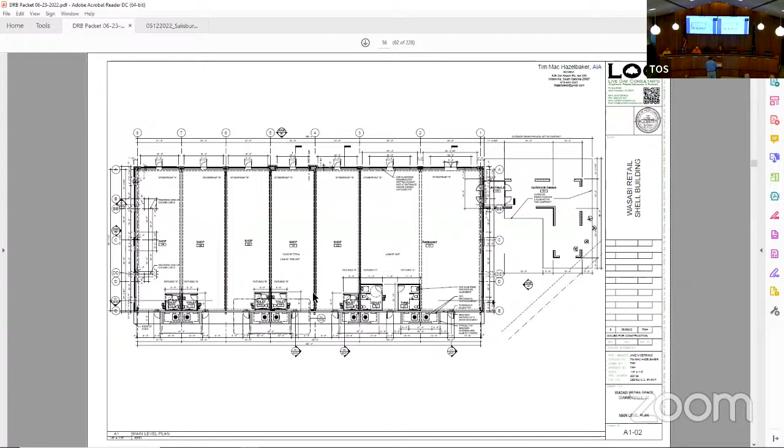You just sign in, state your name and your role in the project. As we do that, do we have any staff comments? Yeah, just one second. All right, so...

This is a request for preliminary approval of a proposed new single-family townhome development with an amenity center. The property is zoned PUD, planned unit development, located west of Old Dairy Road on the Salisbury parcel. Based on the review following our staff's comments, the site conceptually meets requirements. Plats will be approved before permitting. Street trees are provided on both sides of the streets and meet the required planting requirements. Street trees should be planted so as not to interfere with the proposed street lighting and should maintain a minimum distance of 15 feet. The board only has to review the amenity center and the townhome facades.

The exterior finishes include a mix of materials, including both horizontal and vertical siding materials, shingle roofs, and a brick base to the amenity center. Depth of the front porches is 6 feet on the one provided detail. A detailed elevation of the amenity center has not been provided, and details of the proposed poolside pergolas have not been provided. Detail of the mail kiosk has not been provided, and an entrance sign is proposed. The location meets requirements, but no design has been submitted.

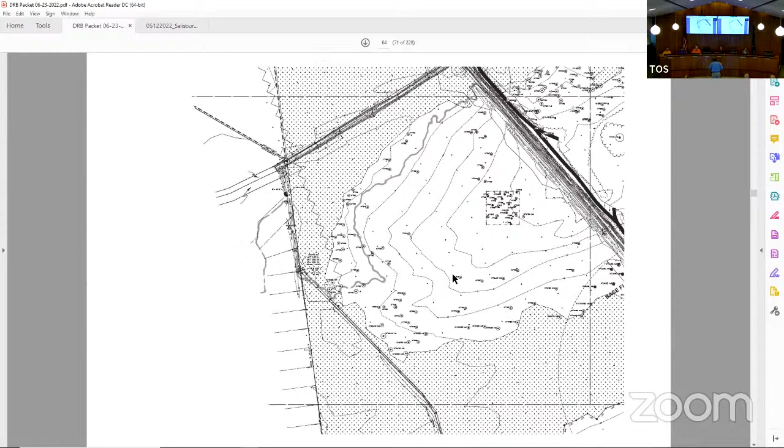So this is the tract where the development will occur. Plat, let's get to a site plan. So at this time, I can turn it over to the applicant.

Hi, my name is Keith Postal. I'm the Director of Land Acquisition for American Homes for Rent. American Homes for Rent is one of the largest build-for-rent companies in the country. We're in 22 states with approximately 60,000 properties we lease. We are typically a long-term owner of all our properties; in this particular community it would be upwards to 15 years that we would own this property, so this is not something we're going to sell off. We strive to be good neighbors, and we try to work very well and partner with our municipalities where we can, and we've had a lot of success doing that.

Our portion of the Salisbury Farm community is approximately 360 lots in its entirety, with 124 of those being townhome lots, which we'll be speaking about later. It will be a heavily amenitized community, which you'll see when the rest of the presentation is made. There'll be a clubhouse, a resort style pool, parks, and walking trails throughout the community. One thing we do as the owner is maintain all the common space, including the entry monuments, parks, and walking trails—they're all ours to maintain. We maintain all the homes as well as all the individual homes' yards; we do the lawn maintenance for everything.

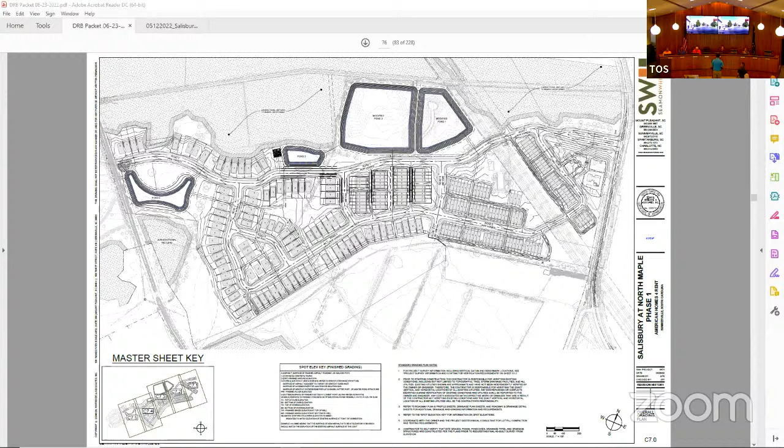So, but with that, I'll turn it over to Travis. He is the architect for American Homes for Rent, and he'll take it from here.

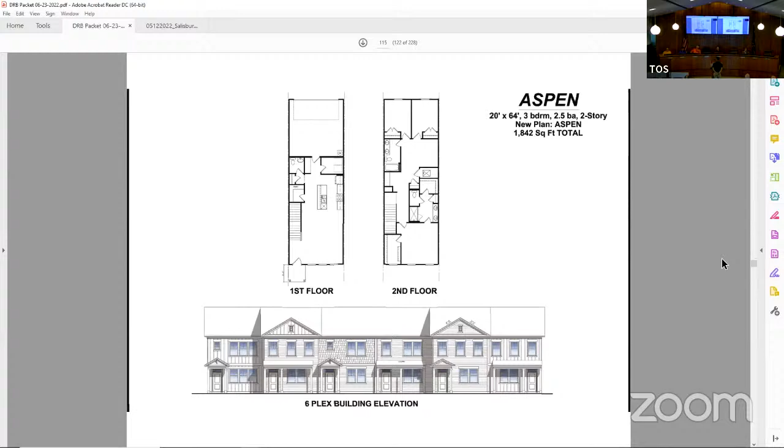Tell me when you want me to stop. Yeah, these are just going over the different elevations. We do break them up. There was a comment about not having all the same pitches, so we wanted to show the stagger of the townhomes.

And in this slide, we also showed the different color types. We are using Sherwin-Williams, so we wanted to make sure we use a high-end product. We are doing siding, HardiePlank.

Wanted to bring some so you can kind of see it also, some of the paint colors that we actually put some color on so you can see.

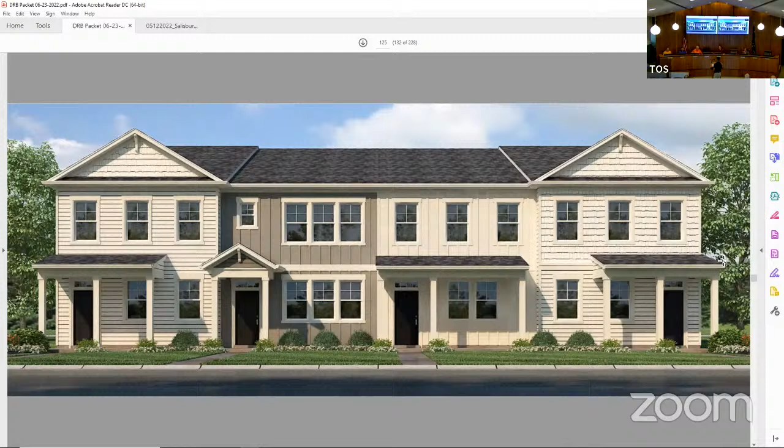And here's just another color rendering of it, more of a realistic color of what they're going to look like.

I think you said the porches are 6 foot deep. Yes, sir. Who's that? Minimum 6 foot deep, that's correct.

And that's all we have. Okay, you want to talk about the amenity center?

Doesn't look like it's changed too much. No, we didn't really change too much on that. What we wanted to do was show it on the fly through, what it looks like. So we kept the gables, kept the color, Sherwin-Williams alabaster. We're going to provide brick to give it a little color in the bottom, and then we're going to paint that same color, so it'll give it a little texture. And then there's the metal roof on the dormers, black windows.

All right, well since you're up here and we've got the amenity center up on the screen, we can start with that. You want to start? Not really. Okay Matt, thank you for the opportunity.

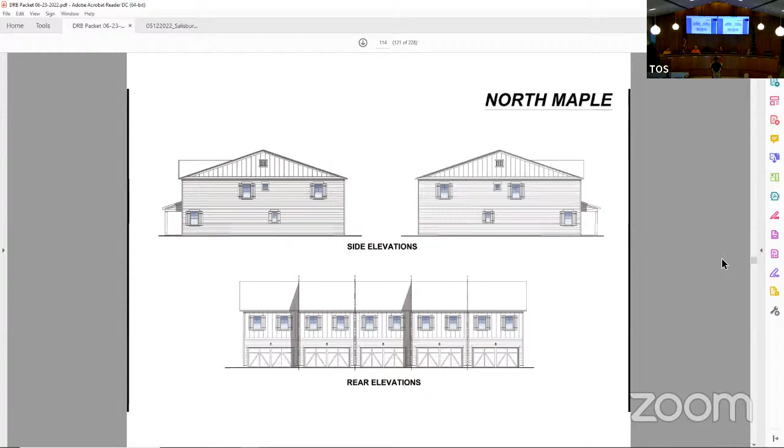Let's find a good one. Hold on. Twice. That good? That's fine.

I know we already looked at the site quite a bit, so I feel like we already commented on it. It appears, based on this drawing, there's one way in and one way out, and I just think that's a non-starter.

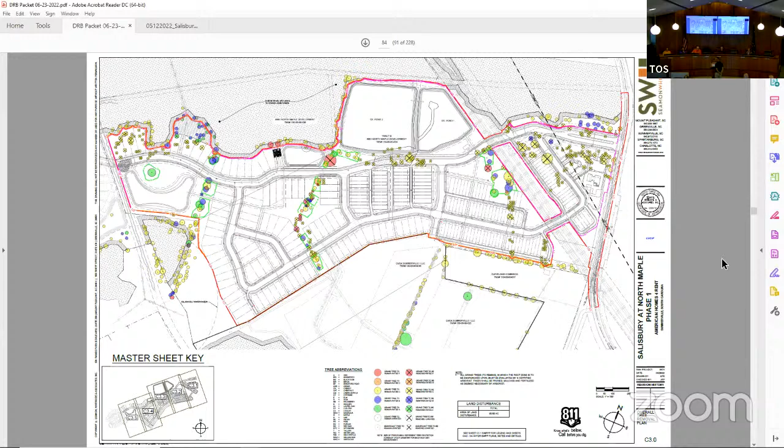That's why these are being dealt with together with the following project, the apartments south that will front on North Maple Street. That will address the connection between North Maple Street and Old Dairy.

Is there a drawing of that in this set? Not in this set, they have not developed it yet. Since it's a master plan development, you will see it in the other part of the overall master plan, which will come up when that development comes up on the south side.

Can you just point to where it is, Tim? And Aaron, correct me, this is where they're going to be coming in, right? That's correct. You don't have enough frontage on Dairy Road to have more than one entrance, so your only option is to come through back over to Maple Street.

So there is a full traffic impact analysis that's been done for this whole property, master planned as a whole, and engineering is looking at that. You'll turn that into engineering, not us. That's correct - engineering, SCDOT, everyone's involved, even the developers, as far as how these entrances interact with this master plan development. Although on this drawing you do not see the access to North Maple, that access will happen with the development to the south. Makes sense, and since it is master planned, each developer is responsible for their piece.

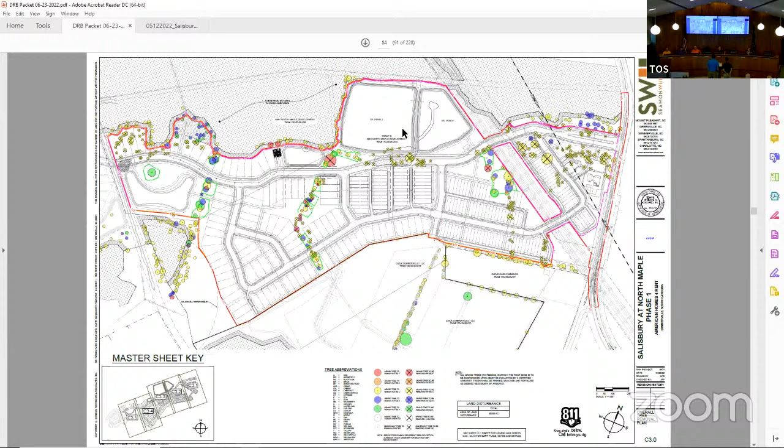Motion for preliminary approval. Any second? All right, we have a second. Further discussion on this? Taking into consideration everything that we discussed. Not necessarily part of the discussion. No, it didn't seem like it. All right, so we have a motion and a second for preliminary approval.

All in favor, say aye. All opposed? I'm also a no on the architecture, based on the architecture. So the motion carries 3-2. Yes, sir. Appreciate it, thank you all. Thank you.

All right, that was number 4 on old business. Looking at number 1 on new business, Broadstone, North Maple Street. Aforementioned development - while y'all come up, Tim, you want to enlighten us on the staff comments? The first item under new business is the Broadstone North Maple Street.

The applicant is requesting conceptual review for a proposed new 348 unit multifamily development on 23 acres. This property is zoned PUD, planned unit development. This is also part of the Salisbury parcel. Based on the initial review, the following are staff's comments.

The site conceptually meets requirements. The proposal includes 348 units in 14 buildings, an amenity center, and 574 parking spaces. This is 1.64 spaces per unit. Grading and utility plan, landscape, tree preservation plan, tree removal permit and full architectural drawings are still required. A connection to the single-family townhouse development to the north is being shown on the plan and is required.

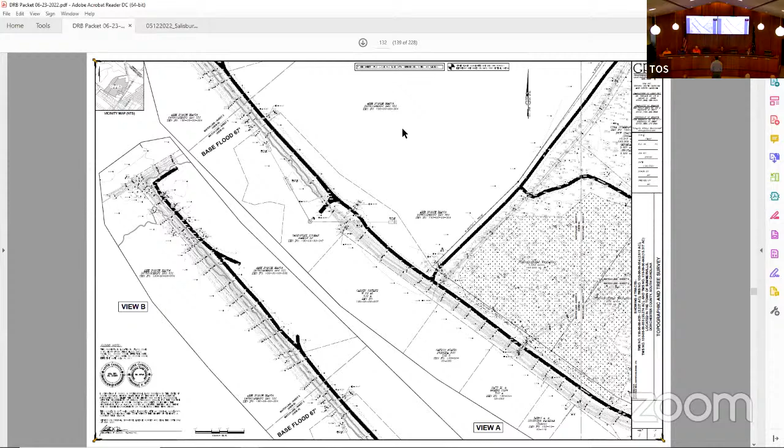Let's get to the site plan. So the architecture that is demonstrated is not what they would build, it's what has been built elsewhere, from what I understand from what was submitted.

All right, you want to go ahead? Yep, absolutely. Good afternoon, my name's Andrew Howe, and I'm with the developer Alliance Residential. Just a little background on us, we are the number 2 largest multifamily developer in the country. I'm the regional partner based in Charlotte, North Carolina, covering North and South Carolina. We've built several deals in the Charleston market, and we're extremely excited to look at this opportunity with you all. As mentioned earlier, we're looking to develop here 348 units, all 3-story product with a detached clubhouse.

Some quick background on us as it relates to the architectural elevations: we wanted to represent a project we have down the road in the Ingleside master plan community. Within that community, we wanted to show you guys what the building footprints look like, the clubhouse, the level of detail we go into, but certainly we understand those will not be the final colors or elevations by any means. We wanted to get some initial feedback from you all, and we really appreciate your time. At this point I wanted to bring up Aaron Schmidt at Seamon Whiteside, our project manager and civil engineer on this one, to answer any additional questions you guys may have.

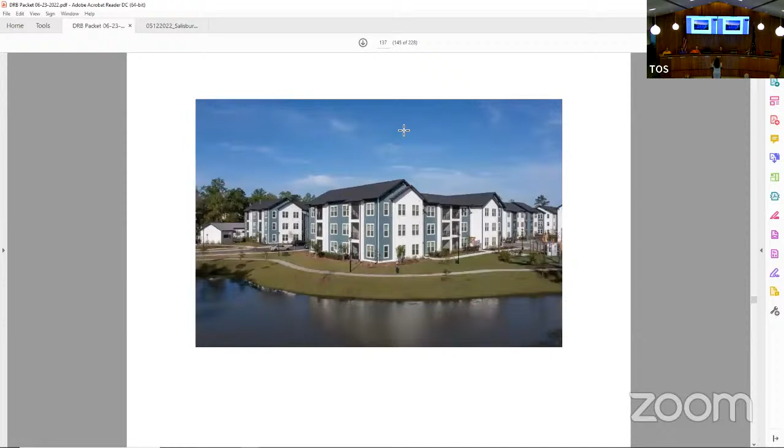The trees shown on the rendering are hard to see because we have trees input there too, but the trees highlighted on this plan are the trees that our landscape architect and the town's arborist walked and marked. The yellow ones are C grade trees, and the blue and green are A's and B's. So we're definitely keeping blues and greens, and we'll keep as many C's as we can. Obviously there's mitigation required in the PD, so we will make sure any tree removals go through the town permitting process and the mitigation process.

Okay, so you really have two, although they're kind of close together, but you have two accesses to Maple, right? Correct. The other one is a right in, right out, and it'll be used more for the neighborhood commercial parcels that are fronting the road, more so than it will the apartment complex.

This may be a random question. Can you give an example of other communities that have, in addition to the one that's north of here, a single entrance for this many homes? I mean, 300 and some units. Any other examples of that in the Lowcountry that are really limited? It seems really limited as far as access goes. But honestly, I don't pay attention every time I go somewhere else necessarily. So can you think of an example that would come to mind?

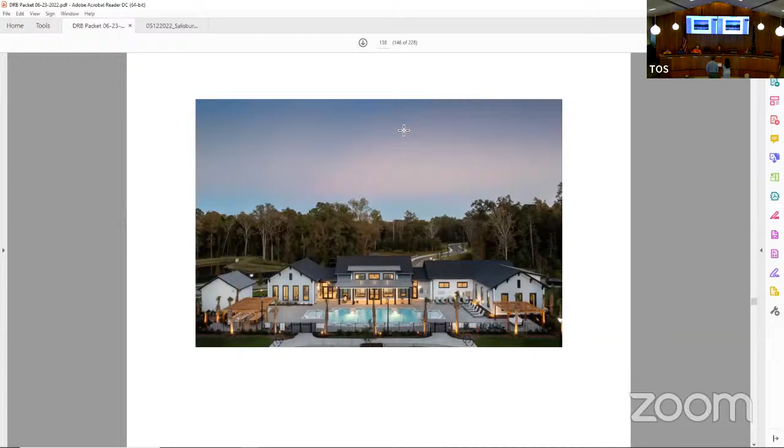Yeah, I think one thing new about how we operate is our process. The project you're looking at here is our most relevant one. It's in the Ingleside Master Plan community, right off Palmetto Commerce Parkway, if you're familiar. Within that community there's a very similar design review board we had to go through. One thing that sets us apart from a lot of our competitors is that we go through a process we call a charrette.

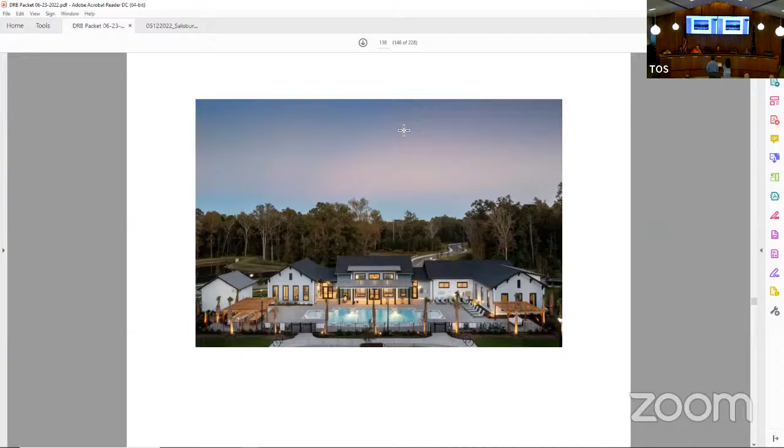We usually get the design team involved, the land sellers involved, and if any town council members or the community want to be involved, we outline the overall theme for the project. Similar to what you're going to hear a lot is where's the coastal vibe. For the town of Summerville, like you've mentioned, the beginning is you want a feel that welcomes into the community, not something completely different, which we understand. If there's anything specific you're looking for going forward, we welcome that feedback and can adjust. As we move through this process, we want to make sure it works for all parties.

My comment would be to take a good look at Summerville architecture. It's not coastal, and it's certainly not the same as Palmetto Commerce, but definitely take a close look at Summerville architecture. We look for elements that connect it with the town. We don't want to change the town, we want to make the good parts better. That's what I'd add there. That's certainly our goal. Okay.

I don't really know much about the PUD, but this is really dense. This is a nice drawing in front of us. I give you a lot of credit for facing it north, which I think makes sense. I don't see that very often, but putting the pool on the north side is a great idea. The entrance is very nice, but when you get into the bulk of the development, whether you look at the site plan or that isometric, that is dense. And there's really no street.

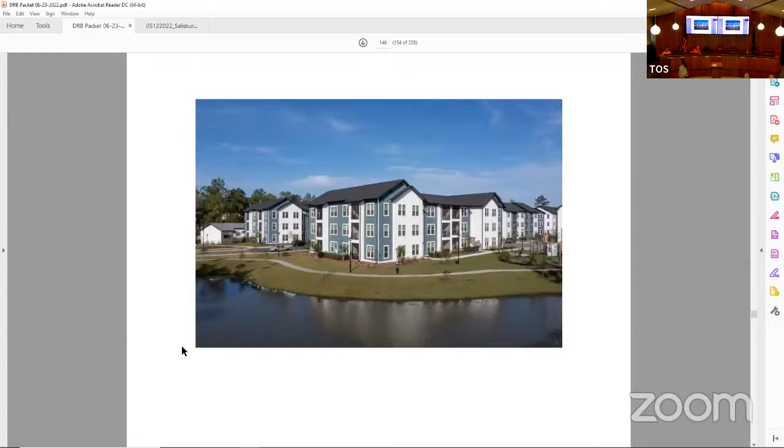All right, next item is number 2 on new business, Alta North Maple Street, conceptual.

This is a request for conceptual review for a proposed 338 unit multifamily development on 18.3 acres. This property is zoned GB General Business, located on the other side of North Maple Street, just south of the Old Trolley intersection.

Following your staff's comments, the site conceptually meets requirements. The proposal includes 338 units in 5 buildings, an amenity center, 8 garage buildings, and 533 parking spaces for 1.57 spaces per unit. A grading and utility plan, landscape plan, tree preservation plan, tree removal permit, and full architectural drawings are still required.

The conceptual architectural images generally meet UDO requirements and include a mix.

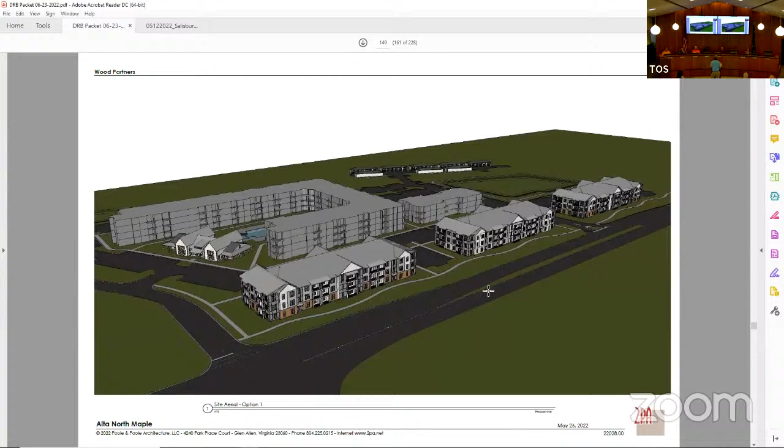There you go. So this is just a perspective showing the volume, the 3 stories along Maple Street, the main entrance to the clubhouse, and then the U-shaped building. And you see the garage is kind of tucked in the back. Next slide.

The inspiration for this is that these buildings tend to be long, multifamily buildings, so articulation of the bays is something we want to look at. The inspiration photos here show different bays that create relief in the facade and also material changes. We also like to articulate brackets more, just to give more texture, and the use of different materials for more texture and emphasis on certain parts of the building.

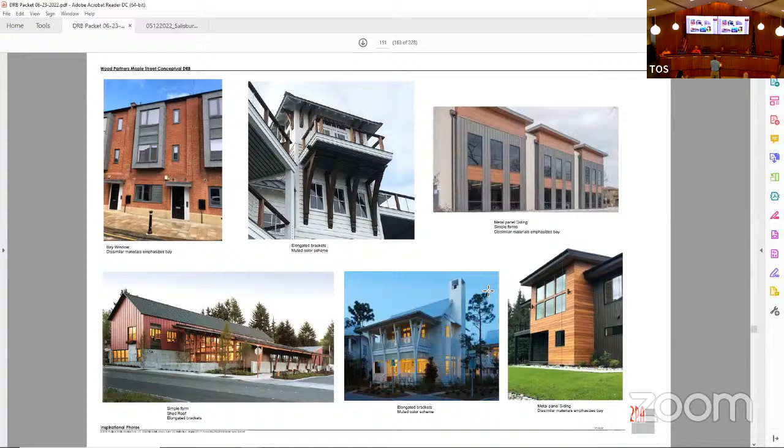This one is closer to downtown Summerville, with lots of texture, not a lot of color change, sort of a muted palette. But again, the bays are defined and broken up, and we use different materials to emphasize corners and bays.

These buildings are going to be unique because if you're coming towards Summerville on North Maple, you'll see the long side of the building, but the short side as well. So it's kind of a building with no back, if you will. We emphasize the bays on the ends as well in this one.

This is a little bit bolder take. Again, definition of the bays, both on the end and along the North Maple Street side, and more use of different materials. This is closer to what you might see in Nexton right now.

This is looking across North Maple from Old Dairy, just a perspective showing the size and layout of the buildings.

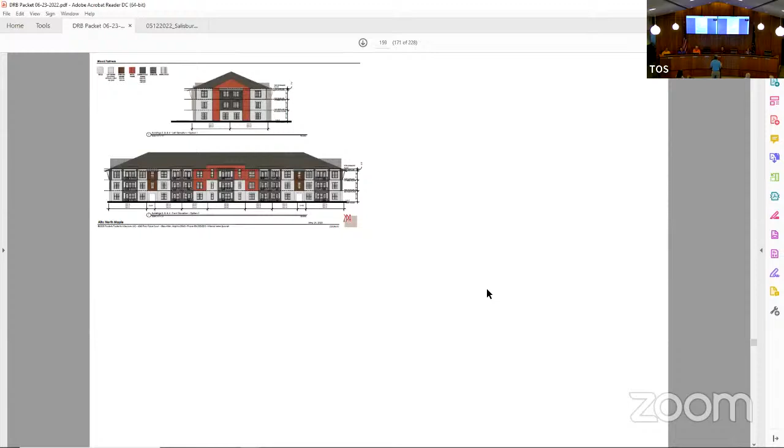And the 4-story building would carry on similar architectural characteristics.

I'm a little nervous that the clubhouse is going to get dwarfed. You have big apartment complexes or condos that are 12 stories, and a little clubhouse, and the scale is so different that it almost makes more sense with 4 stories and the clubhouse. I'm nervous about how that clubhouse is just going to lose its street presence, overwhelmed by everything behind it.

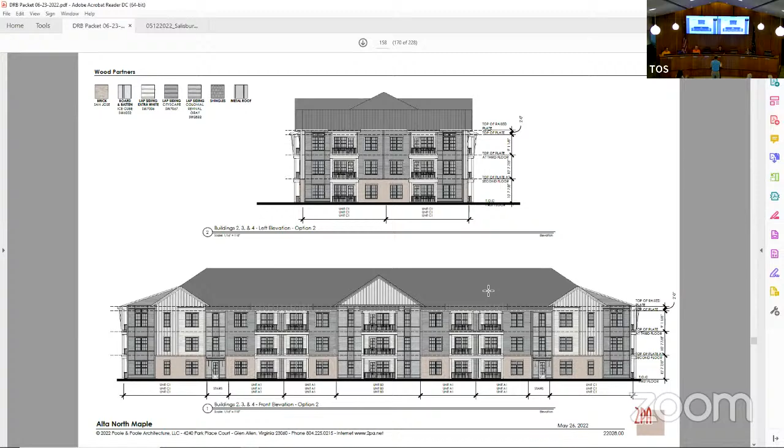But we'll open it up to these guys and see what they'd like to add. Matt? Color or? Yeah, either one. That's fine.

You're billing it as 338 units on 18 acres, but because of the shape, it's more like 338 units on 12 acres. I think it's just too much. I think the buildings are overwhelming, and the parking lots are too long and too straight. Coming off North Maple Street, it's a straight shot to the back. There's nothing to break up any of the traffic, and there's really no room for anything other than buildings and parking lots on this lot. I just think it's too much. We're not voting on it, but that's just my opinion.

Okay, Art. Junior, the 3D rendering looks massive. And why were you counting the 30-foot buffer off of the easement and not the property line? Because that's how we require it to be done.

So basically, if you don't get some break on the easement, you just have to make the 4-story building a little shorter. We would have to rework that corner a little bit, I imagine, because it's a very close area right there between the corner of the building and that road. Well, it'll probably end up close anyway. It's just something that tall, that close to a road, might be a little overwhelming.

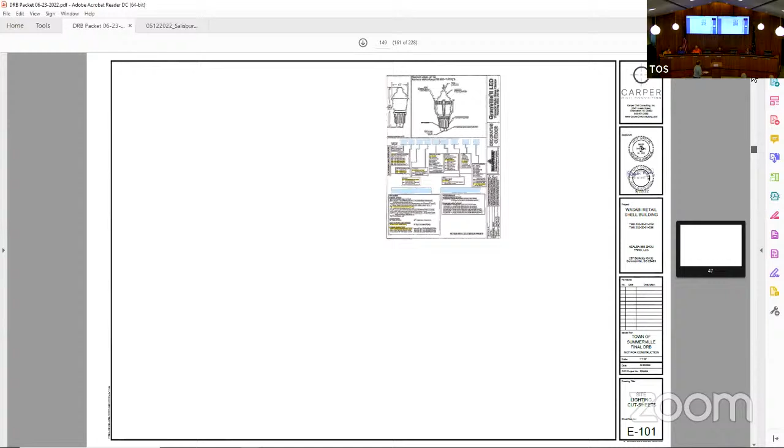All right, we're going to go back up to number 1, Limehouse Drive Apartments, Old Business. The applicant is requesting final approval. Tim, you have staff comments?

This is a request for final approval for a proposed new 48-unit apartment complex. The property is zoned UCMX, urban corridor mixed use. This is just north of the Parkers and the Wash Wizard on Limehouse Drive. If you all remember, this was all one large 6-acre parcel. The Parkers and the Wash Wizard came first.

Following your staff's comments, the tree protection detail does not meet town standards. A tree removal permit is required, and a mitigation plan for preserved trees impacted by construction, which must be approved by the town's arborist. The landscape buffer is required to meet the requirements of section 8.6.2C. Field verification by staff of existing materials to satisfy the requirements will be required.

The residents of Limehouse Villas subdivision have been concerned with the development of this parcel since the original development of the Parkers at the corner. The neighbors have requested that a 6-foot fence be included as part of final approval for the development. The landscape plan does not show the 60-foot radius for canopy trees for all parking. Cypress are not canopy trees, and an alternative should be chosen to replace that selection. All proposed landscape materials must meet the minimum planting size requirement of section 8.7.1 of the UDO.

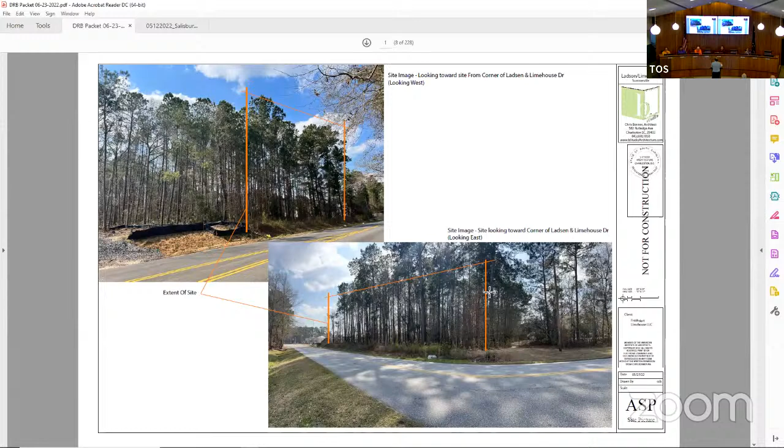Sure, that'd be great. Obviously these are the site images. Currently the property is semi-wooded. As you mentioned, we are the first development up from the Parker's gas station and Wash Wizard car washing place. Go to the next one. This is kind of the corner looking back. We would be the wooded area, past the bright orange square there in the middle of the picture. Go to the next one.

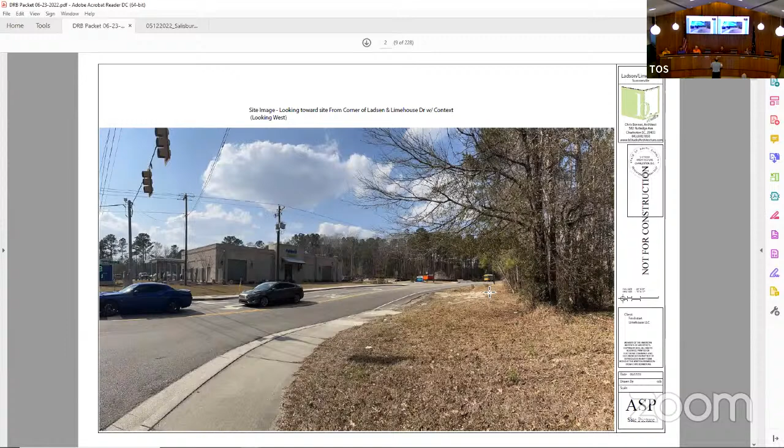We looked at some of the architectural character of Summerville and tried to bring some of that into our project—the use of brick, the prevalence of a couple Flemish gables in town, and some of the urban tightness of the buildings. We tried to bring that to our more suburban site. The corner is a look at the brick color adjacent to the corner store, which we're not necessarily looking to match, but wanted to share as an idea of what's around us and would be visually connected.

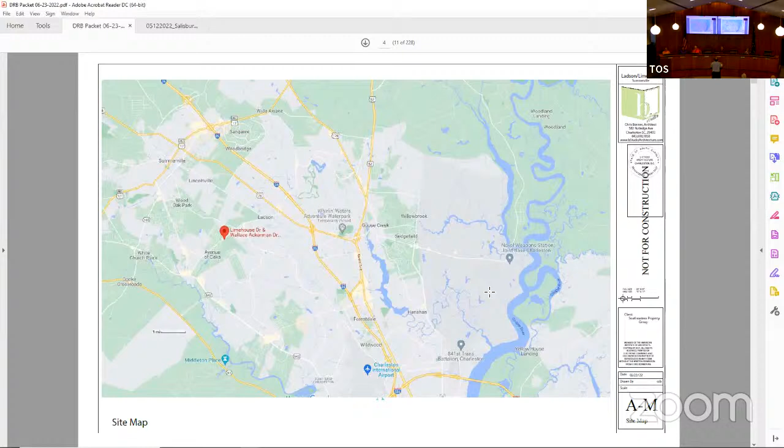Just generally speaking, this is where we are, near the corner of Limehouse and Ladson Road. Go to the next one. Ours is the green square site.

As you can see, the A's are adjacent apartment properties. So while we have townhomes to our north and single family homes kind of to our, I guess that's westish, there are a number of apartment complexes dotting this particular road in various locations and some commercial popping up along Ladson.

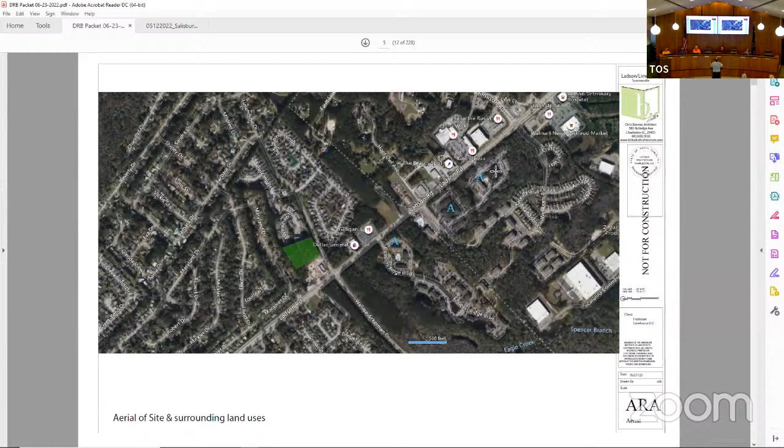It's kind of a little better view of where our site sits compared to some of the other adjacent properties. You can see this one, the Parker's gas station is rolling forward, clearing that side corner. And then next one up there would be the Wash Wizard, which is essentially just a car wash with a bunch of pavement for cars to queue.

Go to the next site. Probably stick here for a little while, it's a little easier site plan to read. We are obviously a smaller development than some of the other ones you've seen today. We're only 48 units in 4 buildings, so each building is of a smaller scale.

Our general premise for the site design was to create that pedestrian scaled, human scaled area. So we grouped our residential buildings together. We pulled them towards the street to create something of a presence on the street. But in pulling that to that corner and pulling the buildings together, we did the best to get these apartments away from our adjacent neighbors.

So obviously single family homes, which are to the left, are across the parking lot, across water retention areas and trees. In the townhomes also, we try to pull the buildings away from that property line with a tight road and then the various tree line buffers.

And then in the middle is kind of where we focused the thought of where we hope to create space for the tenants, for the residents, a place that is more walkable. Parking is not right up against the building. It isn't just parking lot, apartment building to your front door. We try to create a little bit of garden space and connection back to what Limehouse Drive may further develop in the future.

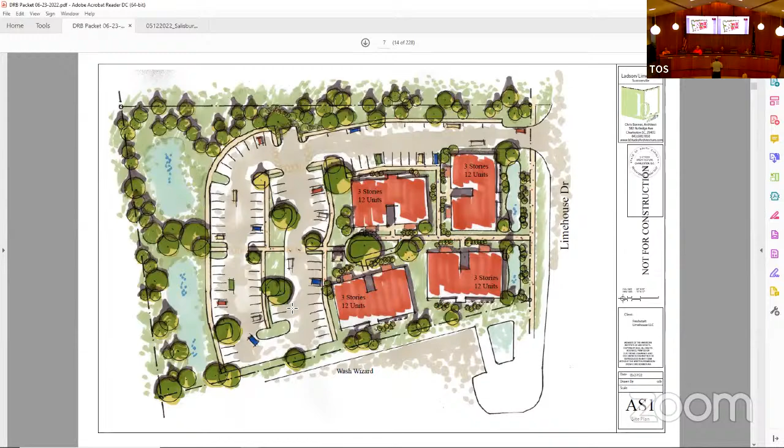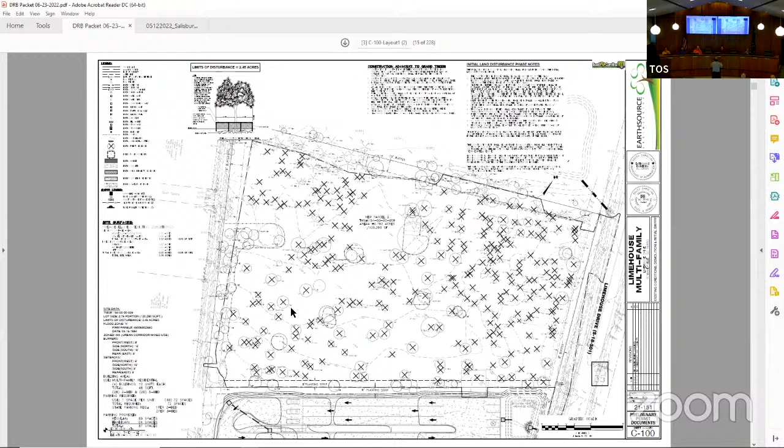Go to the next one. Obviously the tree survey, we are removing a number of trees. They're mostly pines. We are trying to save a couple grand trees, though they are only in the 16 to 18 inch range. We don't necessarily have any big grand trees left on the site. Go to the next, and we will obviously come back through the permitting process to get those approvals.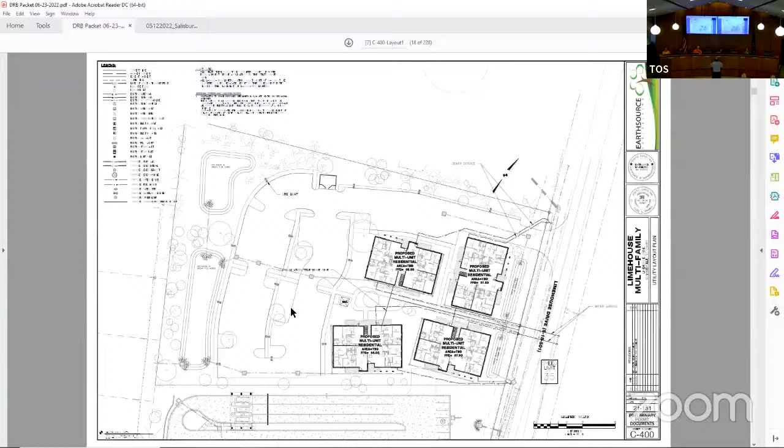Yeah, just more water. Next one. This is once again general sewage and utility connections.

I think one more. I think this shows some of the landscaping a little better. We have some large trees and whatnot in the middle courtyard area, a lot of plantings at the street to give that separation. And then also on our northern border, doing our best to fill that gap between the neighboring townhome development and our buildings as well.

We do have the dumpster that they had brought up, which was on the left-hand side towards the top of the site, right over there. We're trying to bring that closer; it is relatively close to our buildings. There was concerns about accessibility connection to it, so it is relatively close to our buildings as well as the neighbors. It is fully surrounded, and we've added considerably more plantings around it to try, as best we can, to hide it in a way that is generally out of the way and unsightly.

We don't have a lot of space on our site, so its location has been driven a lot by that - accessibility pathways from our own units to keep it nice and close, as well as the ability for the actual dump truck to come up and grab the unit and have that maneuverability in that particular area. Go to the next one.

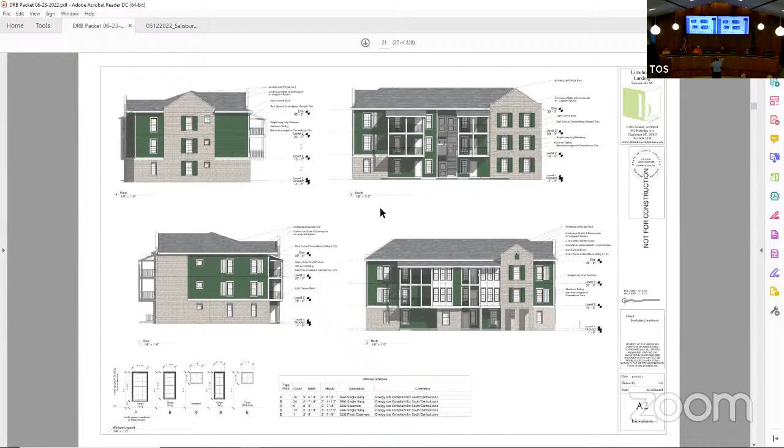There's a decent amount of color variation in the brick color when it actually gets put on the building. It has kind of an old knockdown feel to it. So in the process, we're not looking at painting the building white with green shutters. It's a textured brick that has a decent amount of rustic white on it and a decent amount of red between those joints and whatnot.

On the elevations, there's obviously a mix of that siding and the brick material, bringing the color of the siding material into the shutters. I don't believe they will be actually operable, but they will have the parts to make them look operable, and they're not going to be applied directly to the building.

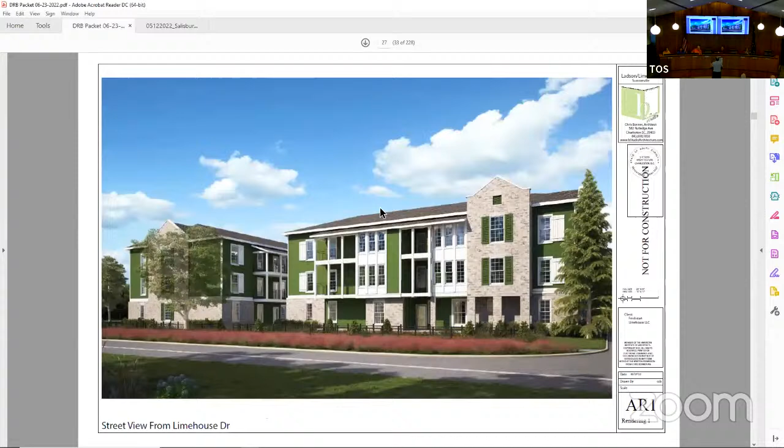Go to the renderings. Next one, color renderings. In the end, we're trying to create a little contrast with the green and the lighter color brick, some variation in the facades. There are some porches that hang off and cantilever out over the pedestrian spaces, as well as depth between apartments, balconies, entrances, and doors.

Go to the next preview. Being smaller buildings and able to bring our buildings relatively close together, we've created tighter instances that give some view corridor and give some containment to that public space in the middle for the residents, where other apartment complexes might have more of just a parking lot to apartment building relationship. We're trying to create some pedestrian-focused space in that middle area between the buildings.

We got one more. This kind of looks obviously from the parking lot back to that shared public area. We've carried some of the design elements of the apartment building itself to the mail center, so the little building in the front is essentially the mail kiosk. It'll have a similar Flemish gable, brick on the bottom, just so it stands up to traffic as the residents come and go from the parking area towards their units.

There's one more, because I think there were some comments last time about looking at different brick combinations. So we looked at different colors and different brick schemes. I think we circled back around to the one with greater contrast that presents a sharper looking building with a little more presence on the site, where the other ones seemed kind of drab and drowned out when we looked at different color bricks. Let's go back to that last slide. I think that's what I have.

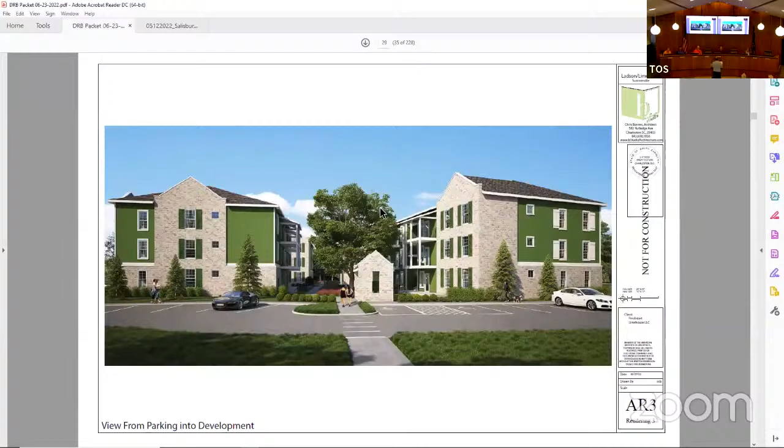Is there any—let's go back to the site plan for a second. Sorry. That's all right.

So also really appreciate bringing all the buildings away from the two residential neighbors. I think that was well done.

There was a concern about the dumpster. Is the dumpster in the same place or a different place than last time? It's in relatively the same place. The shift was not a whole lot. A lot of it was looking at.

Is there any way you could? I know that dumpsters, and that's probably a full dumpster. It's not, I mean, the truck needs to access it. Yeah, is there any way you can approach the dumpster location the way you did with the buildings, and pull it away?

Maybe down at the bottom of the plan, adjacent to the commercial properties. Do you see any opportunities for doing that there?

There was some study of that. I know we had a lot of pushback on the availability of a dumpster to handicap residents. There is part of the review process of this project. There is some funds coming from the state, and they have a very, very strong push on making sure that these amenities, and obviously trash receptacles, an amenity for every residence, that they can be accessed relatively quickly and easily. And so that was first some of the pushback of moving it.

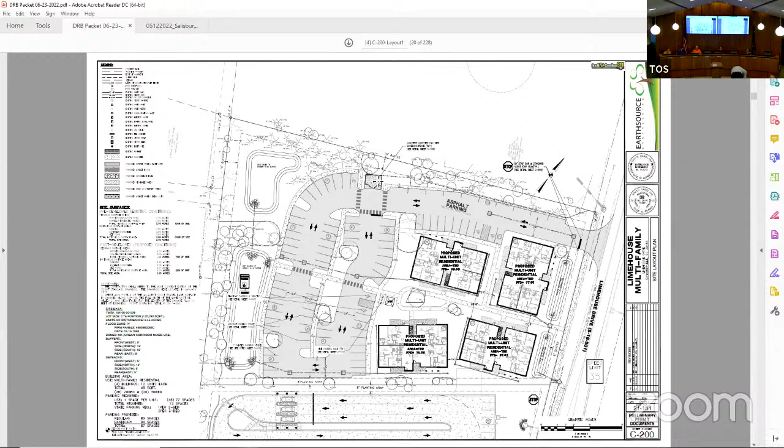Next, we have 143 Berkeley Circle, a proposed 11,900 square foot multi-tenant retail building. The second item is a request for final approval for this building. Property is zoned GB, general business. The following are staff's comments.

The proposed outdoor covered patio area encroaches on the tree protection area numbers 2 and 3. This was addressed at the last meeting. These trees are shown on some of the plans and not others - there needs to be a consistent tree protection plan and landscape plan that coordinate. The photometric plan does not provide the required foot candle information. Staff would recommend looking at better pedestrian connectivity between the Wasabi parcel and this parcel. There is a significant grade change between the sites requiring the use of a retaining wall. The applicant will be required to connect the proposed sidewalk on Berkeley Circle to the existing sidewalk that ends on the Wasabi property.

Stormwater requirements will need to be approved by town staff. Concern has been raised by the adjacent business on the planned south property line - they have requested that the screening utilize year-round evergreen materials, possibly a screening fence. Generally the design of the building meets the architectural guidelines.

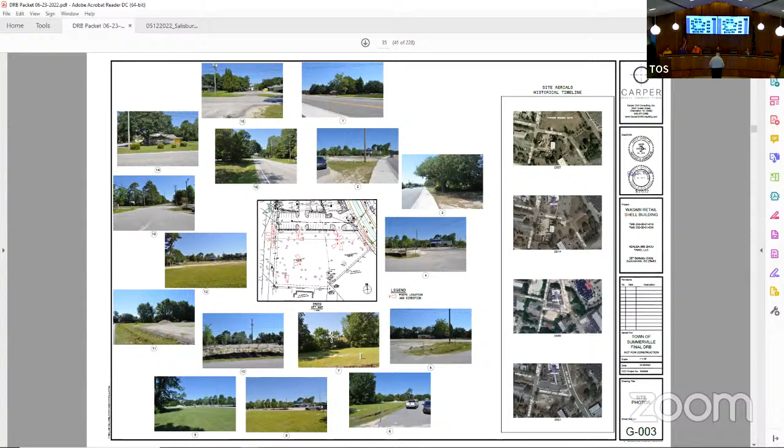All right, thanks. Just state your name and your role in the project and go for it. I'm Tim Hazelbaker, I'm an architect for Live Oak Consultants. We've been here before, of course, as you heard. We felt that our main duty was to show you the brick and to show what happens along the south property line. So I'd like to just start with those, get those out of the way. Here's our wonderful warm brick - if you want to pass it around.

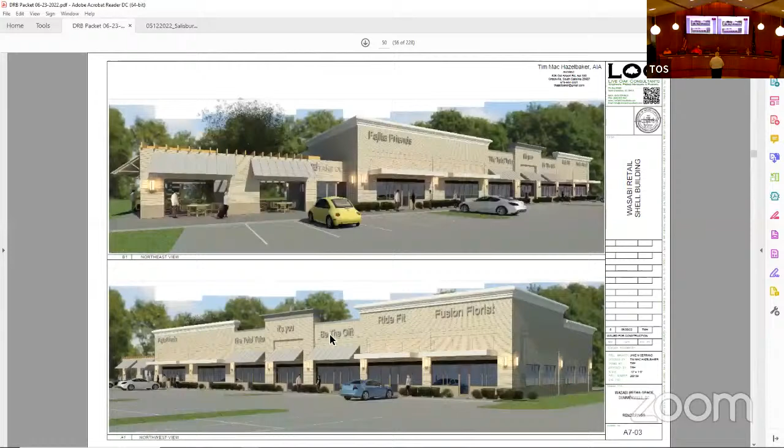So then, let's, while we're in the renderings, keep going. Tell me when. Yeah, let's stop there. That was our main objective from my point of view, to show you what a row of freely planted shrubbery looks like on that south property line.

And right adjacent to that is the dental office, so there's really parking where it's darkly shadowed on the lower right-hand side. With all the discussion of the dumpster, that lower rendering is the northwest view of things. And the dumpster has, again, a 7-foot tall masonry structure around it, but it's pulled to the Berkeley Circle street side, which separates it from the full width parking of the dental office.

Mr. Tang has been laboring through this for many months, and he's freely given of every effort he has to get this thing to happen. He is totally willing, and I suggest a 7-foot or an 8-foot fence all along the dental property line there, and Mr. Tang has totally agreed to that.

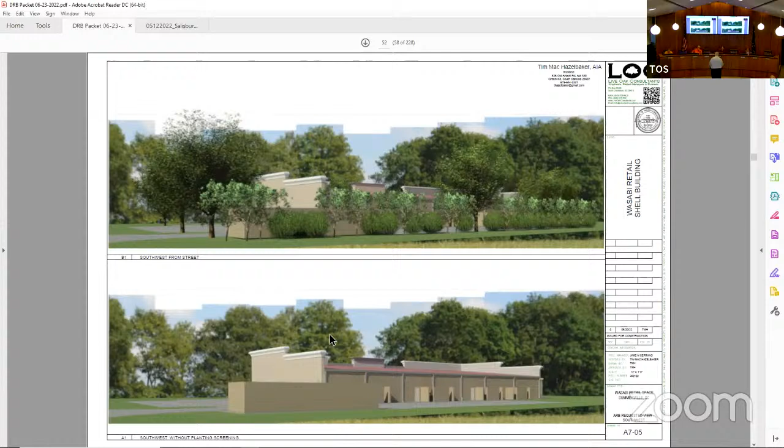Can we see that site plan? So we're gonna get it. Yes, okay. So that's at the low bottom side of the image there—that's the dental office there, and the parking is to the left of that. The dumpster is facing that, I guess, is what you'd say, but visually the building looks at the back of the building, not the parking lot.

While we're there, I guess, there's the outdoor dining area in the upper right-hand part of the development, and those large trees right in the courtyard. We have a letter from the arborist, and they have been graded as D and sickly, so we intend to take those out.

No other modifications to the planting plan have been suggested, but the board considered the outdoor dining as encroaching on those trees, and certainly that's true. It would take a lot of work to ever bring those back into a courtyard kind of a feeling, and we don't really want to change the building shape for a couple old trees that'll probably die anyway.

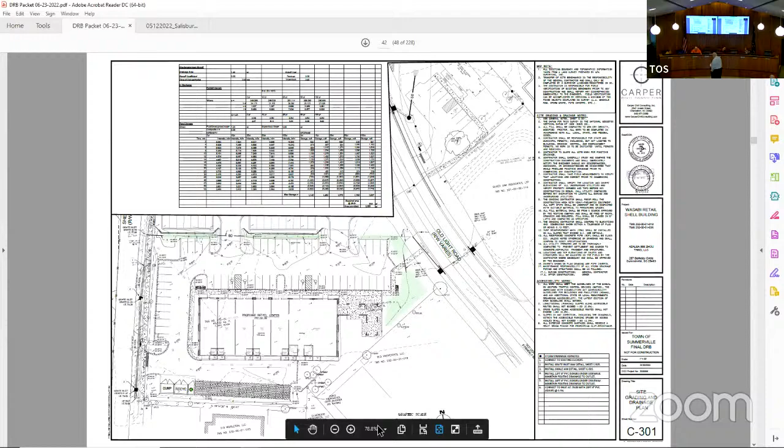That is drainage, the green areas is drainage. Are those supposed to be ponds? It's not meant to be a pond, it was meant to be a rain garden.

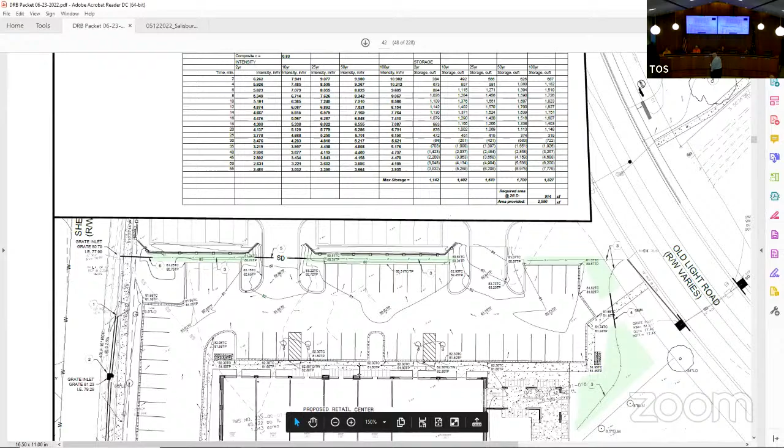So it has a swale there, and then you've got pipes going. I think the detention needs to be about 10% of your total area. 10% normal.

This is less than an acre site, correct? Yeah, 1.14 or something like that. So it's over an acre. Yeah, that gets you into detention requirements, being over an acre.

You've got about a 10% grade from the upper parking lot to the lower. I'm not really seeing how that's gonna happen. 10%, is that what it is? Yeah, it's about a 3 or 4 foot drop over 30 feet. That's too steep, you can't walk that. I don't know what happens when your car gets to the top of that ridge. You can't drive.

I think there's a potential for this entire site to change once you incorporate detention into it and some drainage planning, and it's going to affect your parking lot size and shape and the number of spaces. It might even affect the size of that building. It's all possible, and so it may be to your benefit that we split it up.

Because if we tie it all together and bank it on what staff says and what you have to do in response to that, then the whole thing has to come back. If we split it up and say the building's fine, brick's fine, go with a darker mortar, it'll be a fast meeting if the site has to come back.

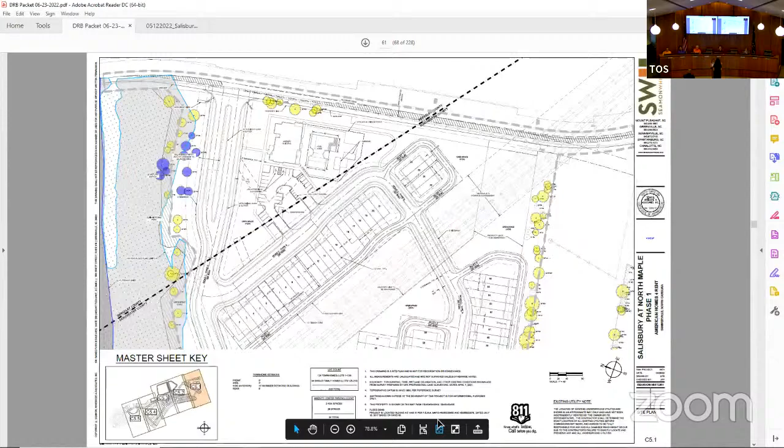All right. Hi, I'm Jennifer Audie. I'm with Bowman, representing the civil engineer for this project. This is a new Tommy's Car Wash location. It's located at North Main and Rackaway. It is the old First Citizens Bank that is currently vacant.

This site has 4 existing driveways, one on North Main at the taper of the right turn lane. It also has a driveway off of Rackaway, and then 2 other existing driveways that are on the interior drive aisle. Our intent for this site is to abandon the North Main driveway and the Rackaway driveway, and then keep the 2 existing driveways on the interior drive.

It is a 2 pay lane car wash, 80 feet. And the first entrance will be an entrance only going into the 2 pay lanes, that holds up to 22 cars stacking. We did provide a stacking exhibit for that, which includes 3 cars inside the car wash. The other driveway would be a full access, for anybody entering for the vacuums or leaving.

The landscape buffer has an additional 3 feet added to it on all sides. The 3 extra feet are for the vehicular drive aisles and parking that's required if you have any of those on any sides of your property, which we do on all 4. So we've increased that buffer to 8 feet instead of the standard 5.

We do have a landscaping plan that we've included with this. We also have a photometrics plan, a signage plan, and then a building plan, which is similar to what you saw on Old Trolley Road, and Ed Gilmore is here to present those to you.

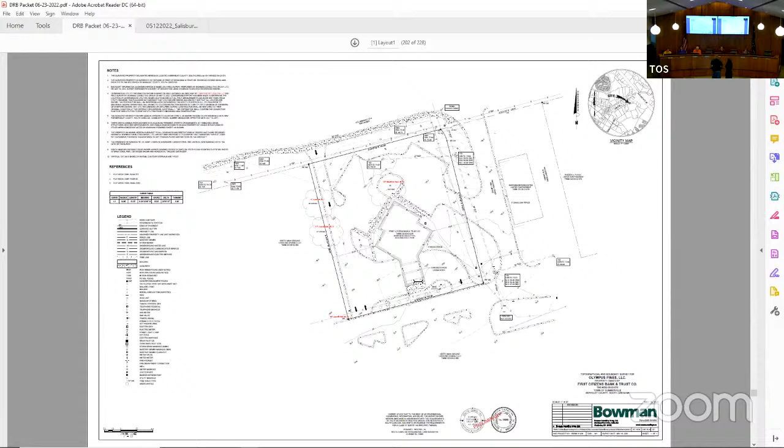You can go ahead with the staff comments on it then. I got it yesterday, I didn't have a full chance to really look at it. If you look at the site plan, they have the 8-foot landscape border, which meets the requirement for all drive aisles and parking, et cetera. So they've got that.

Like I said, I did not have time to do a full evaluation of it, unfortunately. I can pull it up on my computer if you want to see it. We have the 3 existing oaks that are out there, on the plan on the west side. We've also added a number of trees to the site.

First, to address staff comments, in the top plan northeast corner we've kept low-lying shrubs there, so there's no visibility issue. That is also where we're placing the sign.

There's azaleas out there, there are some palms out there. We did some sod also, but we did keep in mind the landscaping that's like from the other Old Trolley Road, but I don't think I pulled it up for you.

Y'all wanted to do that? You want to see the landscaping? And we were hoping for preliminary final, but...

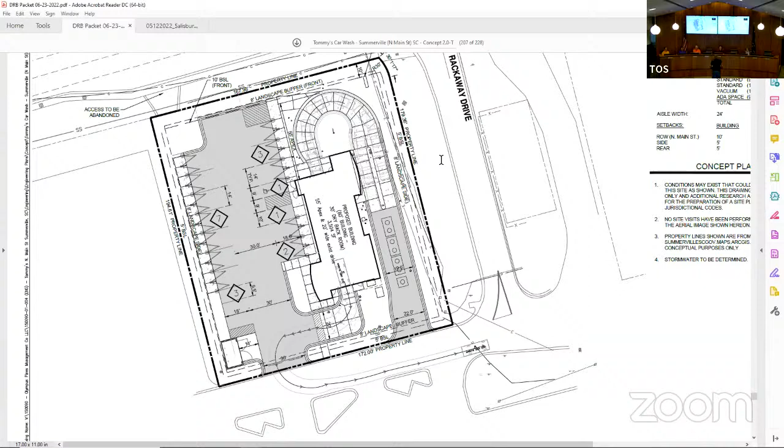Everybody's going in all different directions, and to put a curb cut that close to that intersection with people leaving the parking lot—if you've done a traffic study, I think we need to look at that and get a traffic professional's opinion, because from my experience, that's bad now. Even without the bank there, it's still very challenging.

I'm always happy on a Saturday if I get through there without an accident. I don't know if you drive that, but that's a tough part of that development.

The only thing that may come up in the recommendation is that the full access would go to a right-out, but that wouldn't be a hardship, I don't think, because we can just go to the signalized lights. So we just show full access right now until recommendations come out.

Well, you're going to be able to stack 19 cars, 22 if you count the 3 in the... So that's not going to be an issue. Right, the single entrance. Correct.

That's why I sat there today for quite a while at lunchtime, because every single car that came in, it was below what we can hold. But every single one of those cars would have to turn—it's different on the weekends, and people are going to go wash their car on the weekend. The stack is great once you're on your property.

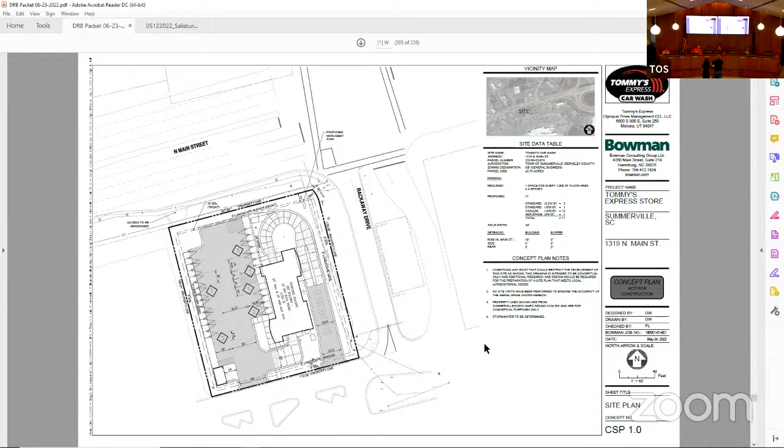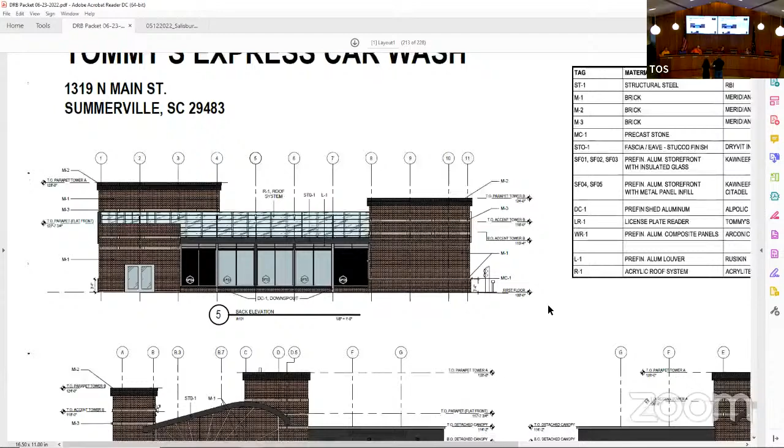The building's the same as the other one. Are there any differences between this and the one we approved? It's shorter, right? That's it. It's shorter, but it's squared off the exact same way, all the layout's the exact same. Same brick or different? Same brick. Does that make sense to use the same brick? Corporately, it's the brick that we're using, which is a brick that's been commonly used in this market.

Okay, well, if we've approved the design, I still like the back elevation better than the front. But last time we said if you just rotate it, it's a very interesting side elevation. But anyway, I think the site works if the traffic will work.

In some respects, it puts us back kind of in the same place we were with the other project. If the traffic study doesn't work, shows deficiencies or issues that are going to affect the site plan, then they really need to come back.

Well, just to reiterate, the original request is for preliminary approval. They've asked for final on top of it. You don't have to do that. You could still have your concerns with the site and the traffic and pending outstanding issues, and you can give preliminary approval.

With comments noted, wait for the TIA to come back, or it is up to you. If there's still concerns with the overall site and layout and how it's going to work, we don't have to grant final at this time.

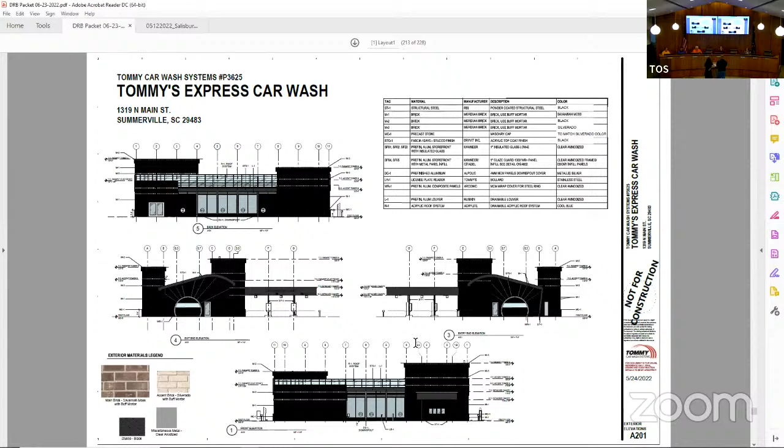All right, thank you for changing it. Oh, we did it again, but the sign was part of this too, wasn't it? But the sign's the same as the other one. Yeah, they were just showing what was previously approved, what was discussed. There's no electronic message center.

On the corner, yeah, the big one on the northeast corner, planned northeast, here, and the big sign on Rockaway, that's in the median there, yeah. And this site sits down in a bowl a little bit, there's a little bit of slope.

Technically, we just approved the sign, so. Have a good one. Thank you, gentlemen.

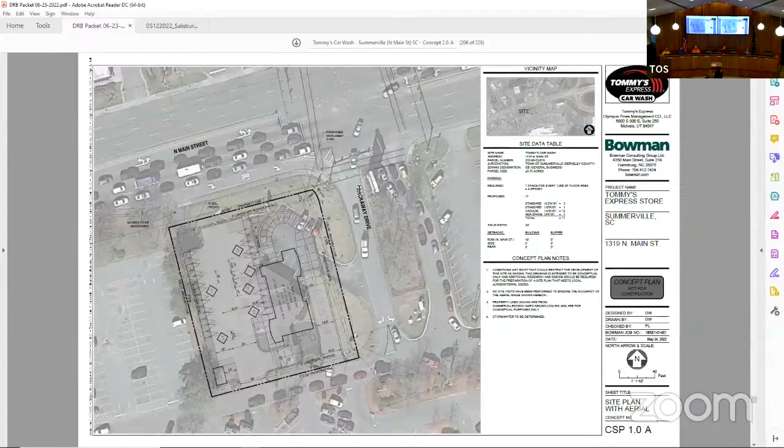Change the appearance of cars. Yeah, they have. All right, we're back to old business, number 3, 1231 to 1235 Boonehill Road, the parking lot addition. Apologize for the delay. If I find it, I'll let you know.

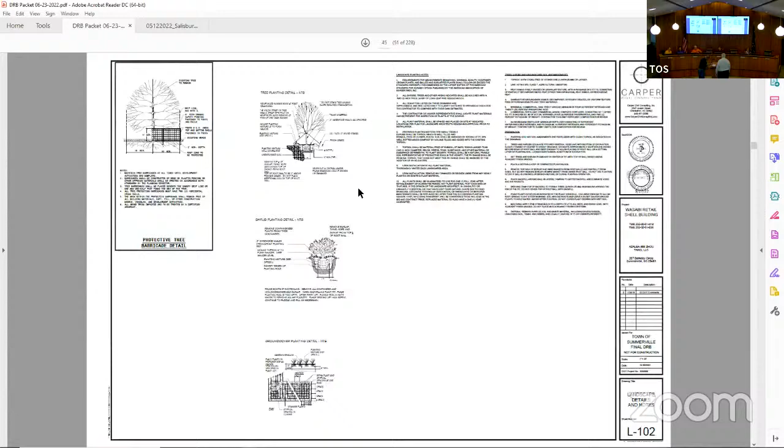This is a request for final approval of a proposed parking lot addition in the front yard. The property is zoned GB. This was previously before the board back in 2021. They've decided to take the facade improvements out of the proposal, leaving just the parking lot. The UDO does require that parking between the front of the building and the street be approved by the DRB.

That's detailed here. The applicant is proposing a permeable paver parking lot in the front, and a tree removal permit and tree protection barricade will be required. All materials should meet the minimum plant size requirements of the UDO.

Here's the overall plan. They have the lake landscape buffer that's required for the new parking. It's pretty straightforward, actually.

Back to you, Tim. Okay, I am Tim Hazelbaker, the architect for this. I work for Live Oak Consultants. What we are proposing is to use the existing grade.

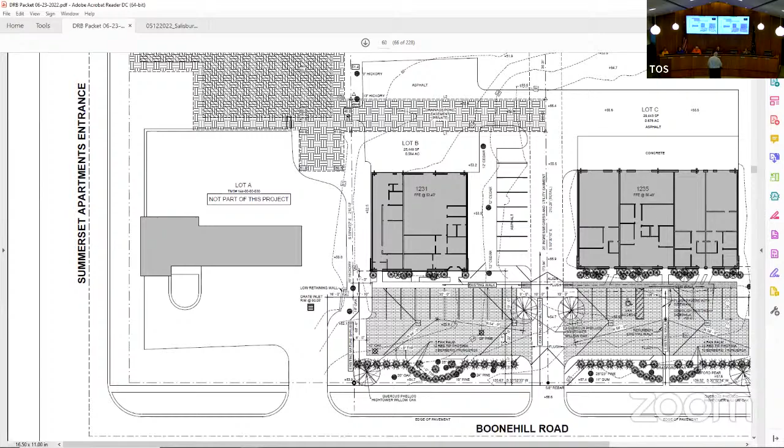The paved alley that goes between and splits on the property line in the center will stay remaining at the same grade, untouched.

Now, there was a problem. Originally, we wanted to do great things and align the 2 sidewalks in front of the 2 buildings, even though they are 2 feet off center.

But using the minimal parking distance for the parking space and the traffic area would put the right-hand parking too deep into the roots of the mature trees. If you pulled it forward, you're getting into heavy grading on the right-hand property there.

So I made the suggestion that you're going to have to give up the pavement or the walkway and go ahead and align it anyway. But that's not an architectural wish, it was just trying to stay away from the roots of the mature trees forward.

And so he's agreed to build a new sidewalk across the front of the right-hand property. And of course, as the property gets developed, we would allow for all accessibility ramps and alignments, even though it's a surface type of paving plan.

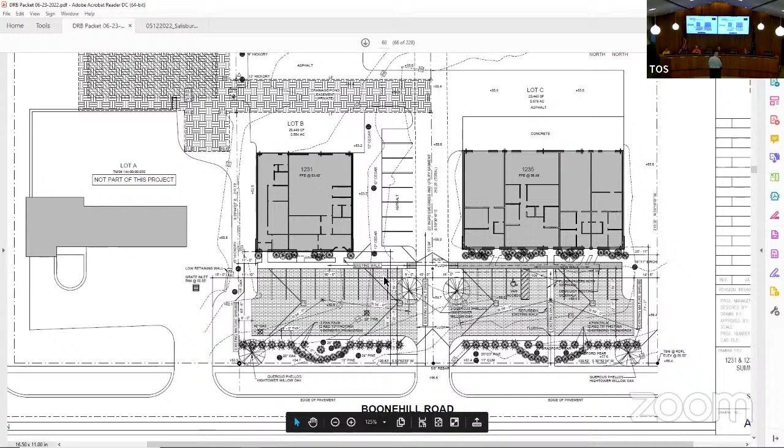If you sell one property and keep the other, and then the existing walkway on the right parcel - that seems like you'd be better off to take it out. The walkway on the right parcel, well, that's existing, that's where the entrance from the street is. Right, but it seems like if you're spending all this money, the incremental cost to replace that and also do it with pavers, maybe of a contrasting color, would be something I would suggest. Well, he does - I mean, you guys threw us out last time because we were too progressive.

Oh, well, I wasn't here, so - on the elevation changes, we're backing off as much as we can, and all trying. Well, hold on, just a suggestion. Yeah. And I don't take it personally if they go unheeded.

And then the dead end parking - how do you get out once you're in? I can imagine getting in, but how do you get out if you're at that end? You just have to back into the relief part of the parking. It's wide enough for the standards of two-lane traffic, so there's enough room to pull out of that last space and back up.

With a big truck that we all drive? It meets standard parking lot dimensions. You can do that, as long as you can get out. He's already done that. Okay, all right, that's fine. Yeah, it meets all parking lot standards. Okay. It's tight, but if you can do it, you can do it.

I think it's a nice project. Well, do you have a sample of the paver? Again, typically what a person does is back to the far corner of that two-way traffic lane, and then use the rest of the two-way traffic lane to straighten yourself out.

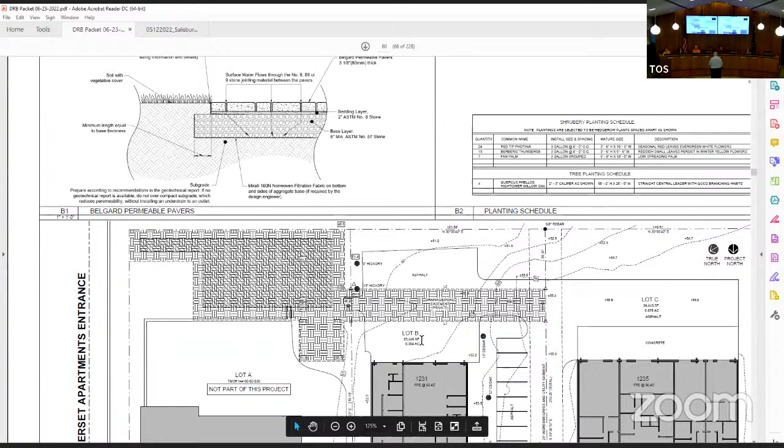What size is that oak tree coming out the bottom left? That's been approved, but what size is it though? It's actually not as big as I think it shows. It's what the arborist commented on. Let me scroll down to see it... It looks like it's a 10 inch, but it's a crooked 10 inch. It's not a handsome tree.

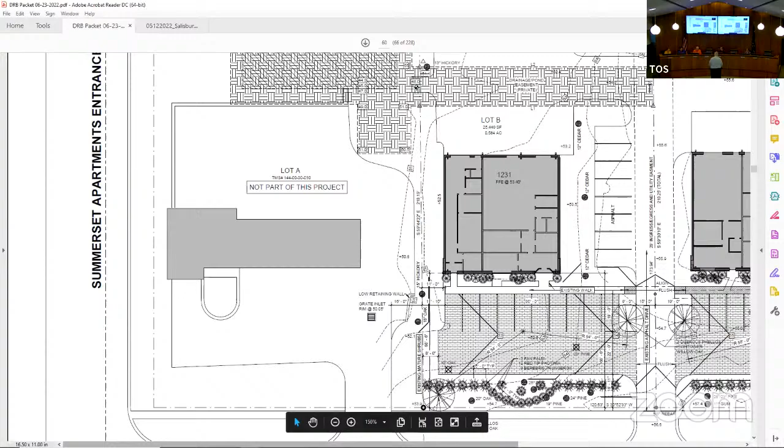All right, anyone else? Okay, anyone like to make a motion? Just a comment - the theme of the landscaping is barberry red and another plant, and I forgot what I've got it labeled at, which is also a red leafed seasonal plant. So it's red prickly with palms in the background as the landscape theme.

Any of that indigenous to Summerville? No, the palms may not be. I think the palms are certainly, and the other is a questionable plant. I read about it and it suffers a little bit with health issues, but a lot of the imports to Summerville are as good or better than the original. Crepe myrtle is an import - if you read about it, it says I shouldn't choose it, but there's quite a few varieties of that plant. So whatever Summerville has in stock.

This is one with the red tip photinia. Yeah, it is - they're dying. They died off. Yeah, that's exactly what it is. Right, flat out, red tips all died.

Since Chris Campo is not here - he's not a big fan of palmetto - so are we overdoing it with palmettos? Well, what's going on is you've got overstory with these pine trees and a lot of root coverage, and I felt that that would be like an indigenous palmetto forest where the palms find their way in amongst the root systems. So the short palmettos, the short spreading ones, the scrub type - yep, that's fine.

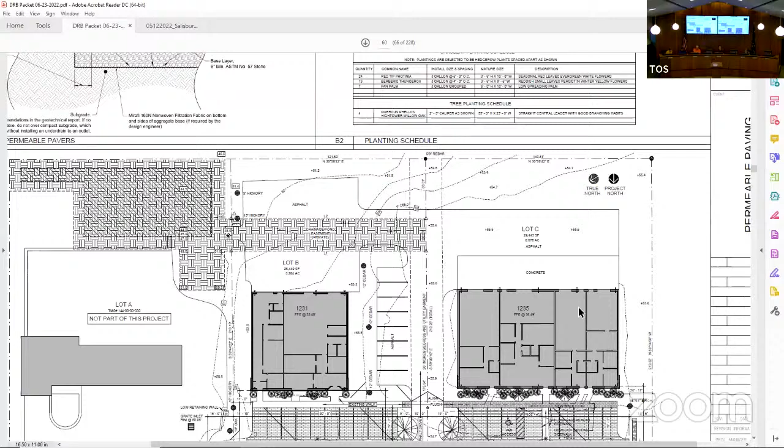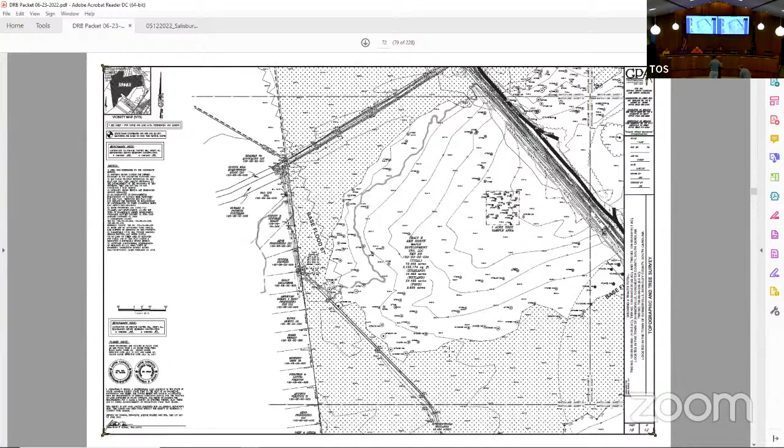Well, we'll find out, but Tim, you have staff comments? Yeah, I do, I just have to get there. Seamon Whiteside tend to give lots and lots of stuff.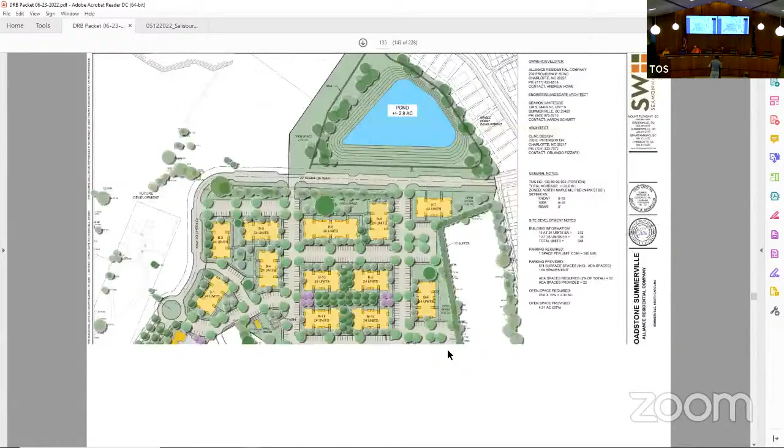I'll just go ahead and introduce myself. I'm Andy Bujoski with Barrier Island Engineering. And to answer your question, yes, Main Road self-storage started on Johns Island, so that's where the original location is. There's some other ones around now - there's actually one on Dorchester Road up here close, it's in Dorchester County already.

All right, so the third item under new business is an application for conceptual review of a proposed new self-storage facility on Paradise Point. The property zoned GB was recently annexed. This is on the south side of Paradise Point, just west of Bacon's Bridge Road. The site's currently partially wooded and was recently annexed. A tree survey has been provided, but a tree removal permit is still required. I know the town arborist has looked at the site, and I know that there's only one tree that they're preserving.

So it should be pretty straightforward for that. The building has a 28,700 square foot footprint and is proposed to be 4 stories tall with an overall height of 55 feet. This is within what's permitted in GB. The proposed layout meets the required buffer depth on all sides requiring a buffer. A grading plan, utility plan, landscape plan, lighting plan, and signage plan have not been submitted. The building is proposed to have metal panel cladding and a brick veneer for the central main entrance. The design should be consistent with Chapter 4, Section 4.5 of the UDO.

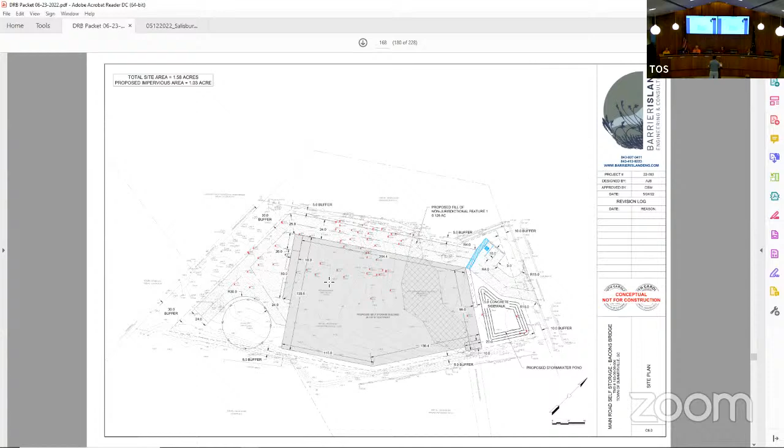There's building out conceptual elevations here. Yeah, we'll talk about the building in a second. Site.

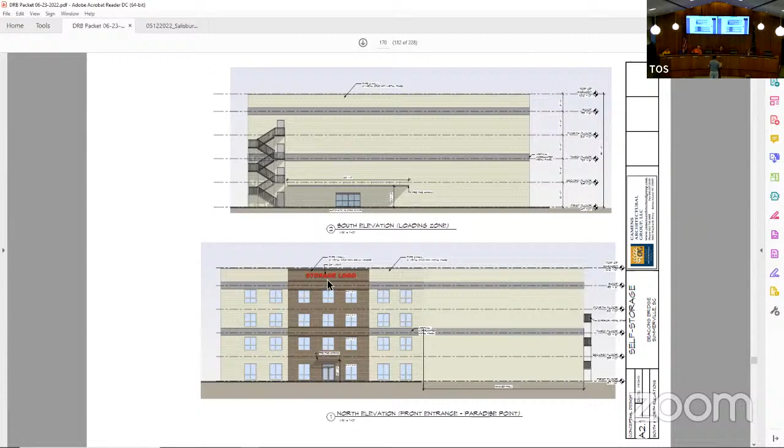Okay, you want to go ahead and discuss the building? Do we, I mean, I guess before we move to the building, are there any specific comments in the negative towards having parking in front of the building here? I want to kind of get some feedback on that specifically before we go through a site design and that gets dropped in our 60% set of plans.

Yeah, I don't think the issue is going to be the 3 parking spaces in the front. You just approved 24 parking spots in front of the building, that's fine. I think you'll have maybe bigger issues with taking up so much of the site with this building. So anyway, we can address the building. Okay.

Elevations here from all sides are provided. The windows side, looking at the site plan, is the portion of the building that's fronting the pond in Paradise Point. Just to the right of the windows is that front corner, and the rest of that side with no windows across it is along the drive aisle on the north side. So it's not truly a north elevation as it's labeled, but kind of both sides. Same for the south side.

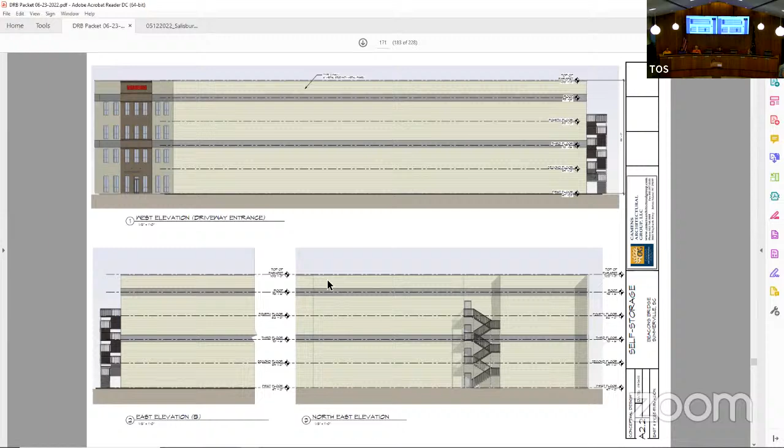Item number 4, new business, Corey Boulevard offices, proposed car wash conversion. Yes.

The applicant is requesting preliminary approval of a proposed car wash conversion to an office/warehouse space. This is zoned GB, general business, located at the northwest corner of Corey Boulevard and Boone Hill Road. It's currently a self-serve car wash. This is their first meeting.

The site is currently a self-serve car wash facility with 6 bays. Existing pavement to be removed and replaced, expanding available parking. Existing paving in the right of way is to be removed and replaced with sidewalk. Some tree removal, possibly requiring a tree removal permit, is included.

Proposed office space is to be added on the Corey Boulevard side with existing bays acting as storage space. 7 parking spaces are to be added. An encroachment into the required 30-foot buffer by the parking will require DRB approval. Existing vegetation must be field verified by town staff to meet buffer requirements adjacent to the multifamily residential property.

Foundation plantings are required per section 8.4.2. 8-foot parking screening is being provided, and the proposed architecture reuses the existing metal roof, with the addition of Hardie siding and a brick veneer water table. Window details must have a header and sill detail per section 4.5.2, and the proposed EIFS does not exceed the 25% limit. So I will turn it over to the applicant.

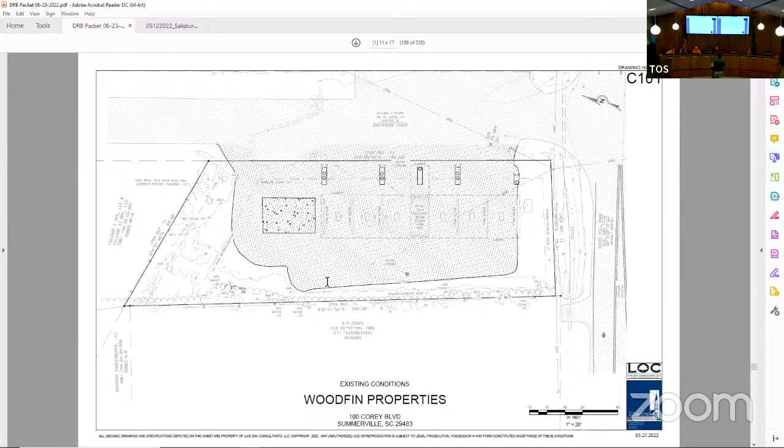Corey Stillings with Live Oak Consultants, one of the civil engineers on the project. Pretty much we're just building off what's already there. As far as the site, we'll be adding parking to the north side. We will be encroaching further into the existing 30-foot buffer, so we would require approval for that. The existing driveway does already encroach into it, but we'll be going a little bit further.

On the front side, currently the whole frontage of the property is essentially a driveway. We'll be cutting that back down to just a 24-foot drive into the site, and adding sidewalk along the front to each of the offices.

As far as the building goes, we'll be using the existing structure. The office space is going to be storage containers. They're actually made here locally — they take used containers, decontaminate them, test the structural integrity of them, and then we will be dressing it up. The base will be brick veneer, the siding will be Hardie plank, and we'll reuse the existing metal roofing.

Also, I'd like to note the site is less than half an acre — only 0.39 acres — so we don't have any detention shown. We currently plan to just sheet flow into the existing roadside ditch on Boone Hill. Utilities will reuse all the existing utilities currently serving the structure.

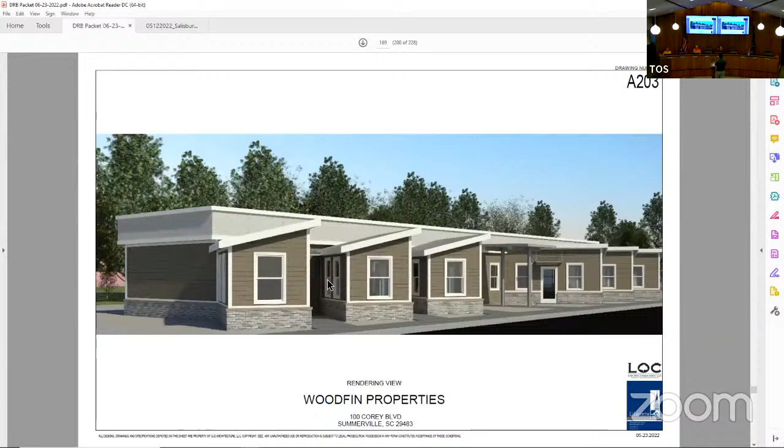Tim, you want to go to the architectural too? I think there's a rendering too. It probably might — this better? It's a choice of words. Which one do you want? The rendering is good, the rendering, okay. All right.

Matt? Site or building? I think I'm actually okay with the site — it's an improvement over what's there. Architecturally, I'm not really getting why we're bumping out the entrances instead of just a traditional storefront. Not really feeling the texture of that.

I think it's very ingenious, and I'm very familiar with the site — I used to use that car wash for years. It's pretty ingenious, and it's a gutsy move.

All right, I like it, all right. Now, we're looking at preliminary approval here for this. Yeah, I love the idea of turning this thing into offices — that is a great idea.

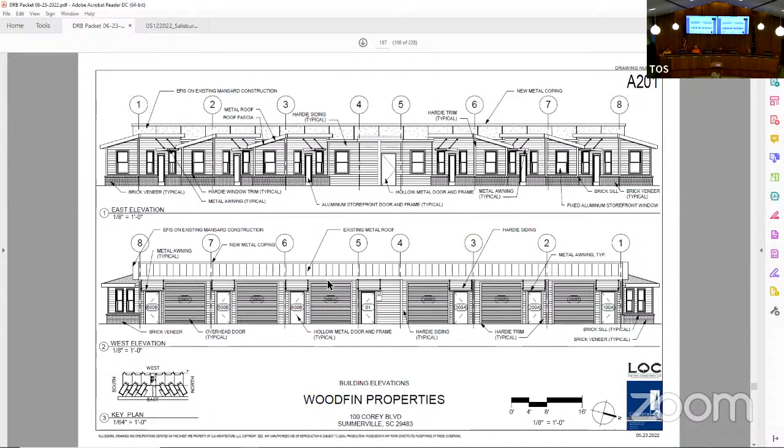I think we have down one to the more, last item, number 6 on the agenda, 602, it must be you. 602 North Main.

As you're coming forward, I'll ask Tim to let us know the staff comments. The applicant is requesting preliminary and final approval of a proposed addition and site work at 602 North Main Street. Property is zoned UCMX, Urban Corridor Mixed Use. This is currently used as Germane Dermatology. The following are staff's comments. The proposal consists of a 1,500 square foot expansion on the south side of the building.

This will close the one-way drive around that side of the building. This results in the removal of parking on the main drive to allow for two-way traffic. The dumpster enclosure is moved to allow for better circulation and the addition of a landscaped island next to the row of parking spaces. The applicant has addressed staff comments from pre-application. The proposed addition will match the existing building. Outstanding building code comments will need to be addressed at the time of permitting.

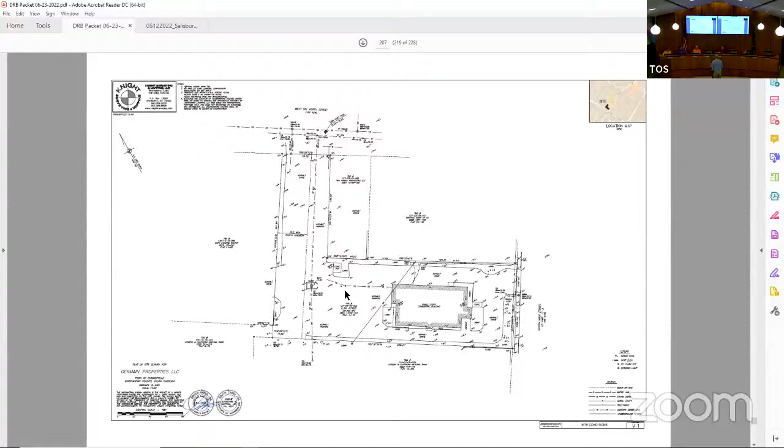So here, this is existing, this is proposed, and I'll turn it over. Hi, my name is Babak Bryan, architect. I apologize, my civil engineer isn't here this evening, but the plan as presented, basically we are taking over the additional driveway on the south of the lot and using that for the proposed 1,500 square foot addition.

In removing that driveway, we wanted to clear up any obstructions in the wider two-way driveway. So that's the reasoning behind relocating the dumpster area, and then just delineating the parking spaces much more organizedly. Right now it's pretty much a free-for-all. I think that little L appendage is undelineated right now. And then in the front, adding a planting area and then relocating the two existing accessible parking spots, but kind of bringing them out to just create a more planted and presentable entrance to the site.

That's it for the site. The architectural proposed elevation shows existing on top. The addition's on the south side, and it's that small. We're just adding 8 medical offices to the existing space.

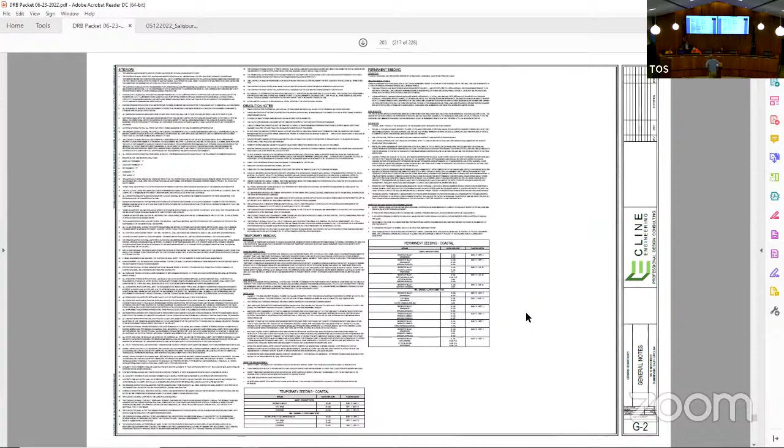Yeah, I made an executive decision when I was putting my packet together - I'm like, how often do we look at the roof plan? Almost never. And I had almost 300 pages worth of packet. No, I understand, I'm sorry. Yes, I believe you're right, it was in there. I believe I understand the concern. The roof plan, which isn't shown here, does address that to some degree - I believe there isn't an intersection. I wish I could clarify it. I didn't really envision this project requiring the cost of a 3D rendering.

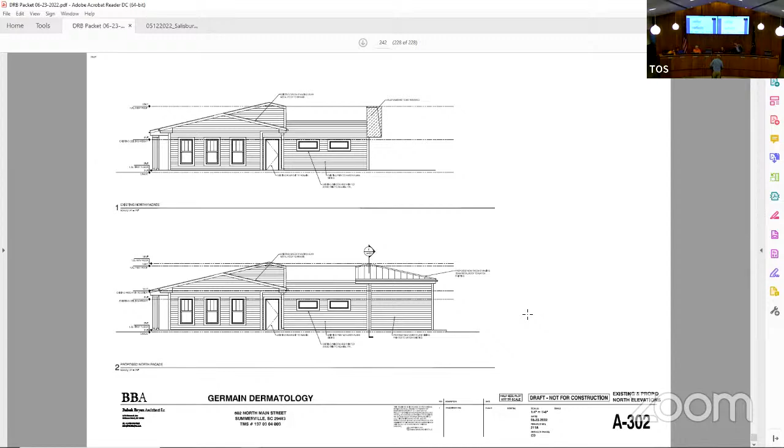I'm actually looking for preliminary and final approval if they would grant it, but I will take whatever I can get. Preliminary seems...

How does this taller addition tie into the rest of the building? It looks like maybe it was built in planned phases, not something that's a complete intervention because the building's too short. I think you can expand on that concern a little bit - I'm a little unclear what you're asking or concerned with.

We'll go back to that elevation. So you have an existing section that goes back and reasonably dies into a very simple intersection. But now you're adding something that's tall in the corner where those two come together, and it's not really clear how.

I really wish that the roof plan had made it into the packet, because I think that would have clarified all of that - that little three-dimensional drawing.

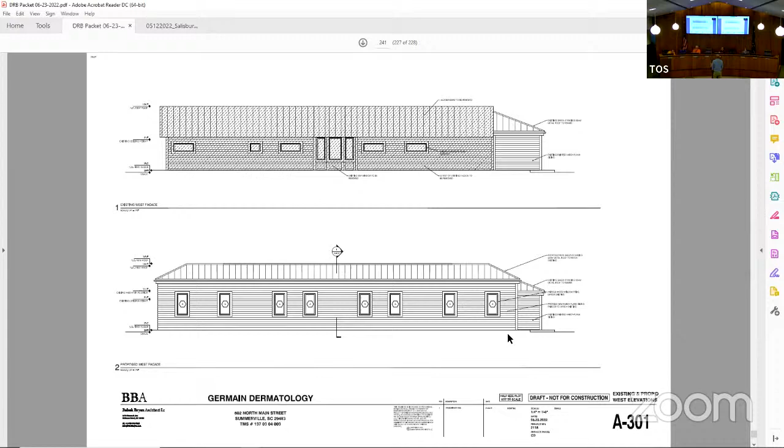It's a little bit of a challenge to follow everything, but I think there would be some benefit to getting that roof plan in there to see how that corner goes together in particular. And I know that 3D stuff takes more time and it's hard to budget that, but as far as communicating it to us, it might be really helpful.

Anyone have a motion? I make a motion for preliminary approval with the comments made. Okay, a second - got a motion and a second. Any further discussion? All right, all in favor, say aye. Aye. All opposed? Okay, we got preliminary approval. Thanks.

All right, I think that we don't have any other miscellaneous items or signs, so we've got a motion for adjournment. Second. All right, yeah, that's all.

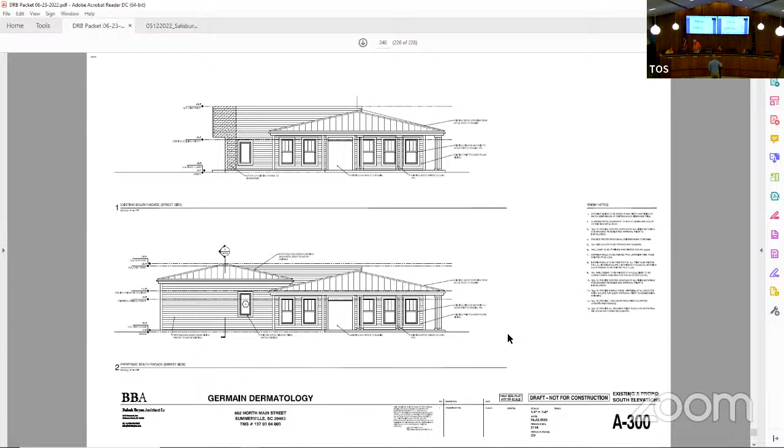Hold on. There's not two of them that look the same. If you see what these look like.